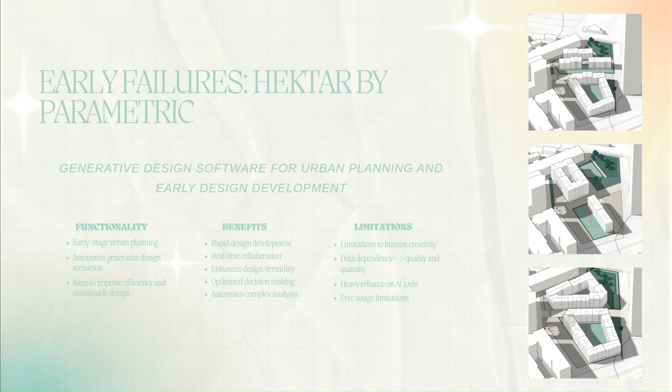And unfortunately, the software did not work because there was a lot of major restricted and limited usage. I was using the free version, and without access to the pro version, I was unable to test my hypothesis due to these limitations in scenario generation and project creation. So I believe the quality of the outputs that were generated was very good, but it did not meet my project goals.

So I decided to switch to Autodesk Forma, and Autodesk Forma represents the next generation of SpaceMaker, which Autodesk acquired in 2020. So this is an upgraded version of SpaceMaker, and it is a cloud-based software also tailored for urban design and site scale modeling.

And some features include conceptual design, layout generation, massing studies, environmental analysis, and you can use Autodesk Forma for architecture, engineering, and construction. So this could bring all aspects of a project together. And Forma isn't just about efficiency, it's about enhancing the quality of our designs from the very start. And it empowers us to make informed decisions early on, setting the foundation for successful projects.

So the three main key features of Forma would be the environmental analyses, the Revit connection, and AI generation. The environmental analyses are predictive, and they help designers evaluate their designs in the initial early design stage for living qualities. And these are visual predictions based upon real-world data. And Forma is a plugin, so you can plug it into Revit and have synchronization between the two softwares to seamlessly work on and improve designs.

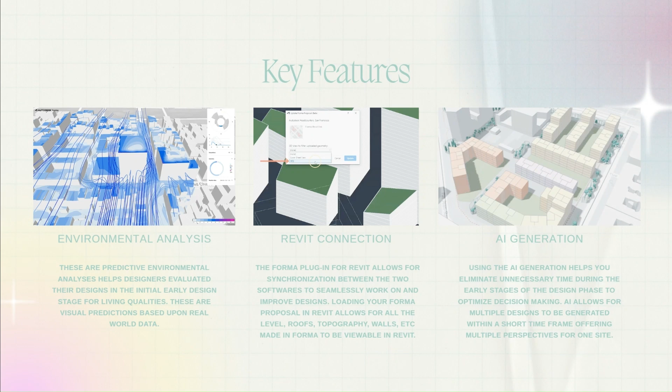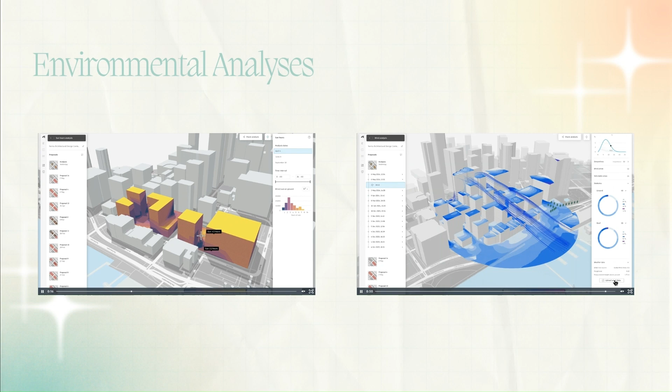So these are two little videos about how some of the environmental analyses work. And since they are predictive, it is going to give you its best estimated guess and perspectives for time frames like days and hours. The one on the left is for daylight, and the one on the right is for wind.

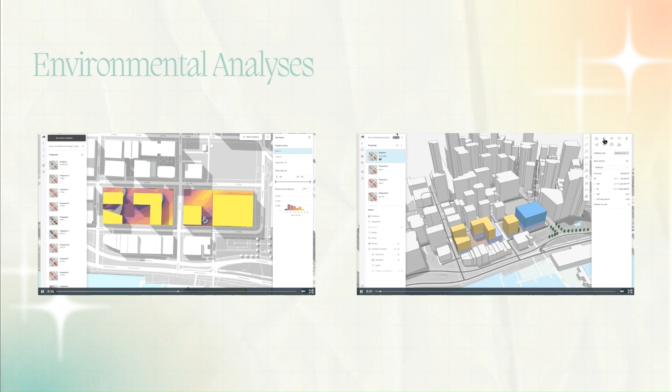This is a little demonstration video that I created, and I used a site based in Amsterdam in the Netherlands and set the parameters for my design. And there is an AI generation input in Forma that helps me create my generations. There are multiple design types to choose from, but I decided to go with apartments since I am creating low density housing for my studio project, so I decided to do something very similar.

So once you click the design type you want, there are different settings to configure your design, or you can choose from multiple different templates that are already there. And I decided to create my own with changing the different configurations or leaving the default ones in.

So I set my max building height to 30 meters with a maximum of 10 stories. And afterwards, I changed the mix of apartments a little bit from the default settings, like having less two beds and then having less one bed apartments and then adding in some four bed dwellings and some studio spaces.

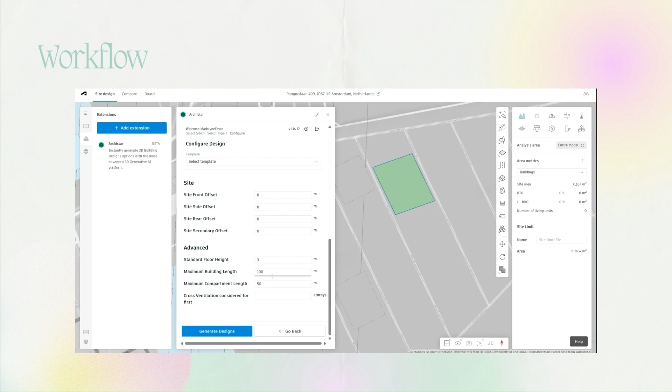And then lastly, you can choose your desired floor height, building length, and other advanced settings like site offsets. And then once you're done, you click generate, and a number of generations would be given to you that you can choose from as your desired design for your final proposal. So these were three of the best generations that it gave me, but I felt like it didn't really meet my needs that well.

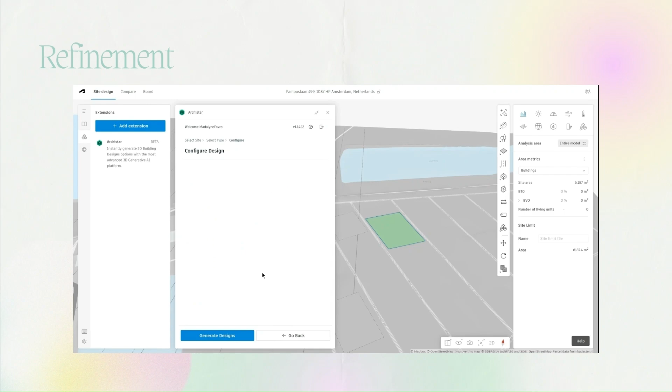So after generating my first set of designs, I decided to go back into Forma to regenerate and refine my designs from the first set I created to better fit my needs. And so I decreased the site coverage to 60% from 75% with the same building height but switched to a lower number of stories. I then changed the number of apartments to have a more equal mix of dwellings, along with changing the building offset.

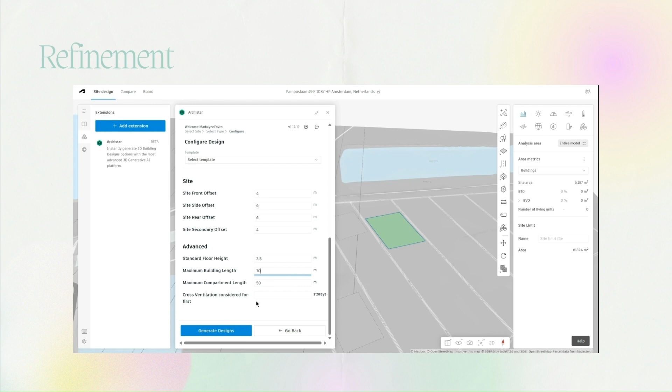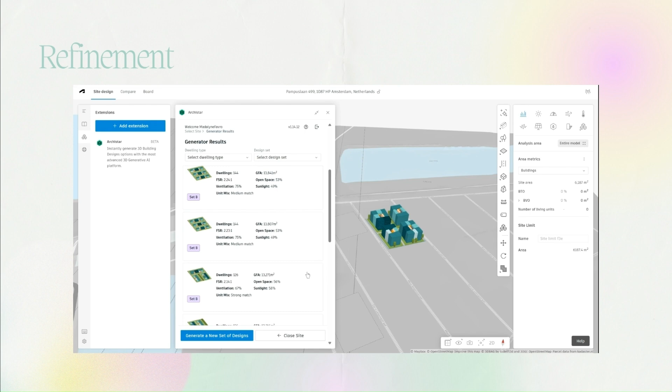And then I also decided to change the floor height from 3 meters to 3.5 meters to allow for larger variation of the height in the dwellings. And I also changed the building length from 100 meters to 70 meters. And so once generated, I was given a completely new set of designs that fit my specified needs, and it seemed to give the exact same amount of generations as my first set of designs did. And so these were the three generations that best fit the needs of myself and for the site.

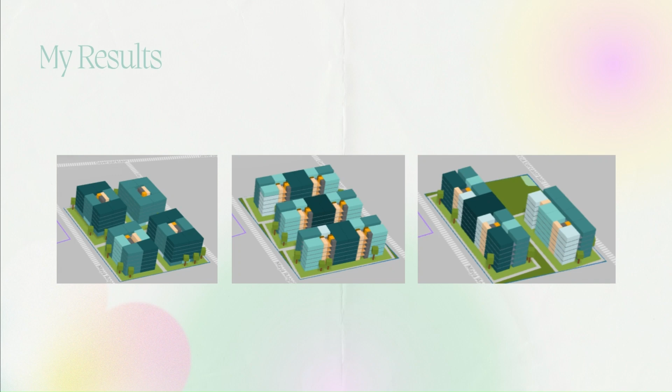So how does AI work within design generation? With Forma, it offers an impressive range of design scenarios, but it's important to clarify how these scenarios are generated. Autodesk Forma leverages AI in the design generation process. Forma utilizes advanced machine learning, rule-based logic, and algorithms to create, analyze, and refine design scenarios. It's all about how these constraints drive the output. The more specific your parameters, the more tailored your design scenarios become.

It's crucial to understand that while Forma can generate an unlimited number of design scenarios, the actual number of generations you see is influenced by the parameters you set. Increasing parameters doesn't actually mean more scenarios. It's about balance and precision.

And so through the generation phase, there's a generation recipe used to create a solution that uses an algorithm to utilize the inputs to create a valid solution. And then each solution is evaluated against specific criteria to be ranked among the rest. And then lastly, it is put in a repeated cycle where the algorithm uses all the input information to refine and generate new solutions. And it keeps on repeating over and over again until you find the proposal that best fits your needs.